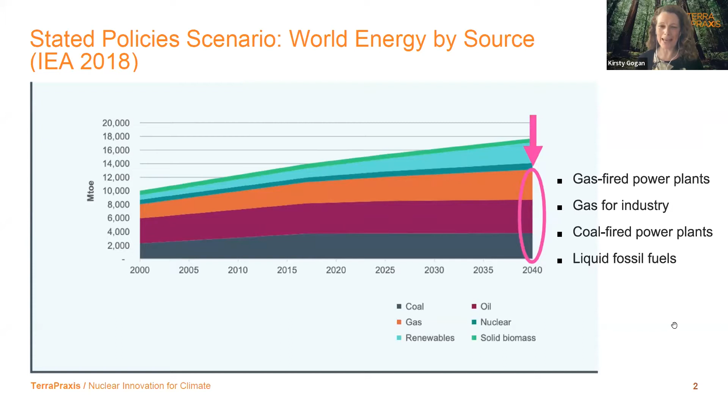So this is why we want to focus on those sectors, coal and liquid fuels, because mainstream modeling consistently projects that most of our energy is still going to come from fossil fuels by 2050. And the hardest to abate sectors are listed here on the side: coal and gas and liquid fuels. The reason I'm showing this chart is because what we're actually looking at is a 3 to 4 degree trajectory of warming, and we have no plan to avoid that outcome. So if you could go to the next slide, please.

Let's just look at coal for a moment, which boomed, of course, into record-breaking generation in 2020 and in 2021, despite all of our efforts, despite COP26. And in 2022, the world now has 2 terawatts of coal-fired electric power plants, adding around 12 gigatons of carbon emissions every year, which is around a third of our total global forecast annual emissions.

Now, you'll have seen at COP26 and in the wider discourse that some policymakers, climate modelers, activists assume that countries are just going to shut down these plants and reduce emissions. But because around half of the coal plants in the world are actually less than 14 years old, it's really, we think, unrealistic to expect such young assets to simply retire. In fact, all of the evidence points to the contrary.

And that's especially when you consider the growing energy demand and, of course, the supply shortages that we're all acutely aware of right now. And even in countries with relatively old plants like the United States and Canada and Europe, closing these coal plants is really difficult and controversial because the loss of jobs and revenues can be devastating for communities. And the utilities also continue to value the reliable electricity that's generated.

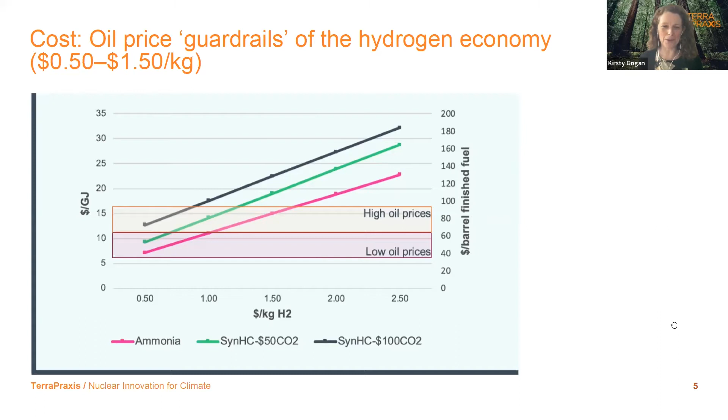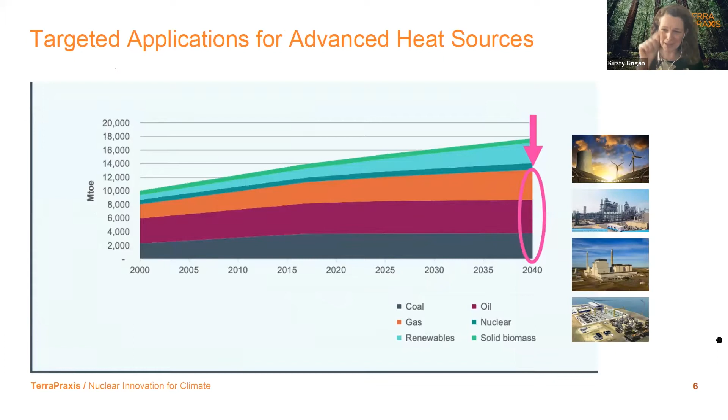Now, I'm going to be focusing today on how nuclear technologies can contribute to these challenges, coal and liquid fuels in particular, targeting the toughest parts of the decarbonisation challenge. So keep this chart in mind. Okay, let's go to the next slide, please.

So if we're going to have nuclear technologies contribute in this way, then we're going to need to design for the requirements, for the constraints. So the constraints that we're designing for here are cost and speed and scale and space. So let's look at these in turn. Next slide, please. So firstly, cost. There's a perception that nuclear is expensive.

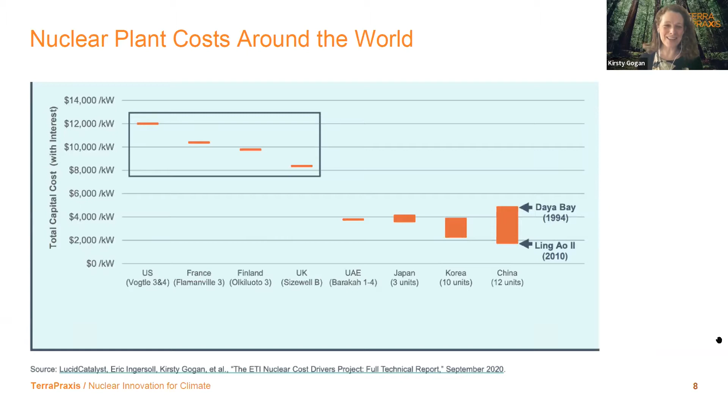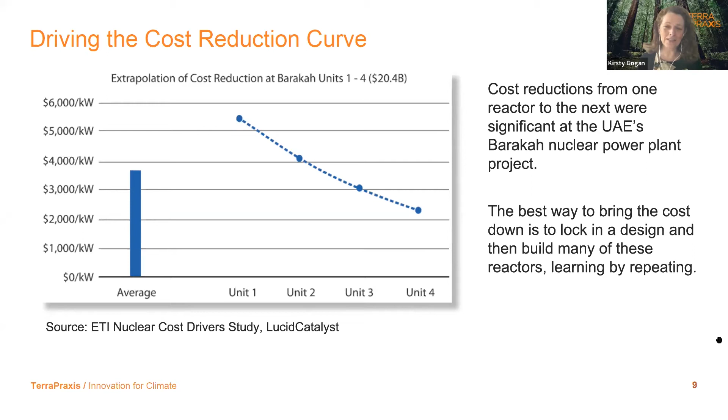So the lesson here is that the surest way to make nuclear or anything really expensive is to do it once in a generation and then stop, and then dismantle all of the expertise and networks along the way each time. And the best way to bring the cost down is to do the opposite, lock in a design and then build it repeatedly. Next slide, please.

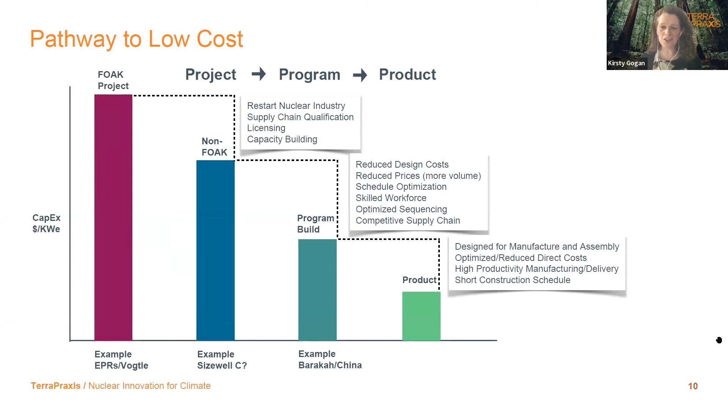So today we're going to hear about how we take some of those principles that I've just described for best practices and cost outcomes, and take them really to their logical conclusion, which is really moving from a project-based approach to a product-based approach, applying the absolute best in class design for manufacture and assembly, and moving into very high productivity manufacturing and delivery environments. This is a very important way of also shortening the construction schedule. You could go to the next slide, please.

So that was cost. So let's look at scale. So we need to start thinking about the scale of the challenge that we're actually addressing. And this is really a big shift in mindset for the nuclear sector, which only has around 400 gigawatts of plants operating today. So if we're pointing nuclear technology at the fuels challenge, for example, we're going to need a radical shift in perspective and ambition.

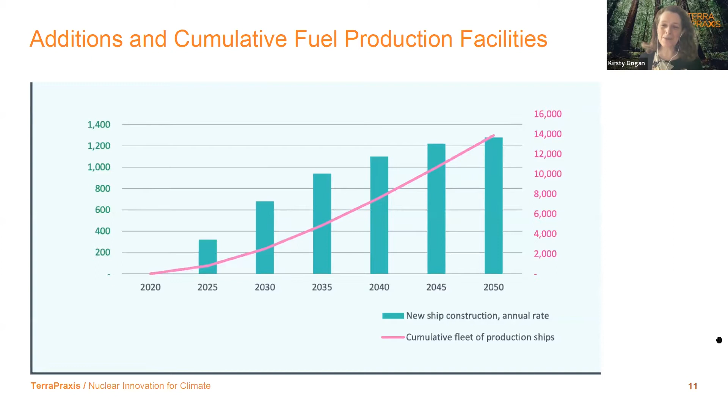So we use today 100 million barrels of oil, equivalent to around 15 terawatts of energy use. That's around 14,000 fuels production platforms if we were to deploy offshore shipyard manufactured fuels production platforms that you'll hear about later in the presentations today, to replace all of that use. 14,000 sounds like a lot, but there's 60,000 large ships already operating in the world today. So it's also important to look at the scale in the context of what's already happening elsewhere in other sectors.

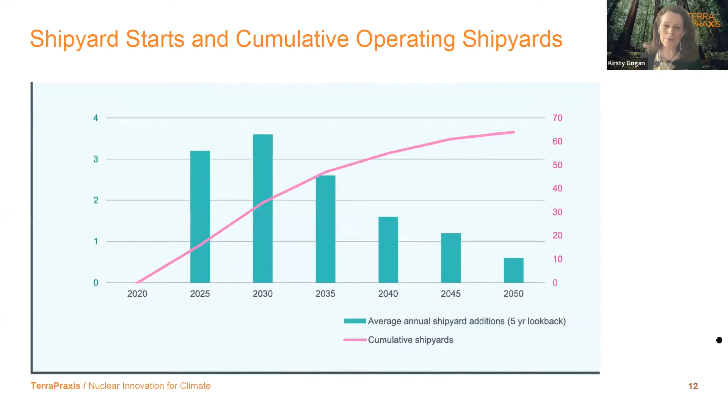Next slide, please. Now, those large ships, they operate for about 20 years, and then they need to be replaced. So world-class shipyards are actually already producing more than 1,000 ships globally, and these shipyards themselves are even operating at around 50% of their potential capacity. So you can see from this chart that global shipyards could actually achieve that very ambitious scale and rate of deployment that would be needed to produce those 14,000 platforms. Go to the next slide, please.

Now, I think we may have skipped a slide. So scale also is important in terms of thinking about the scale of capital investment that's going to be needed to achieve the global energy transition. Oh no, it's okay, you can go back, thank you.

Right now, the global oil and gas industry is projecting around $24 trillion investment over the next 3 decades to 2050 to maintain the current supply of oil and gas, as projected in that chart I keep coming back to. That's capital already earmarked for investment. If we were to try to replace that oil and gas flow with hydrogen produced by renewables, you can see on the right-hand side that would require a radical increase, almost a tripling of capital investment. That's in the context of needing unprecedented investment at a rate never seen before to continue the larger decarbonisation efforts globally, plus investment in additional infrastructure. So thinking about ways of reducing that capital is also going to be very important.

Our conclusion is that if we were to use nuclear technologies, because of the particular attributes of high temperature heat which produces very high efficiencies and productivity, combined with very high capacity factors, tiny environmental footprints, and potentially very low costs delivered with high productivity manufacturing approaches, we could actually lower the overall cost of producing the energy required. My 11-year-old, when I told him about this over lunch one day, said, wait, so you mean it would be cheaper to save the world than to destroy it? It's a funny perspective.

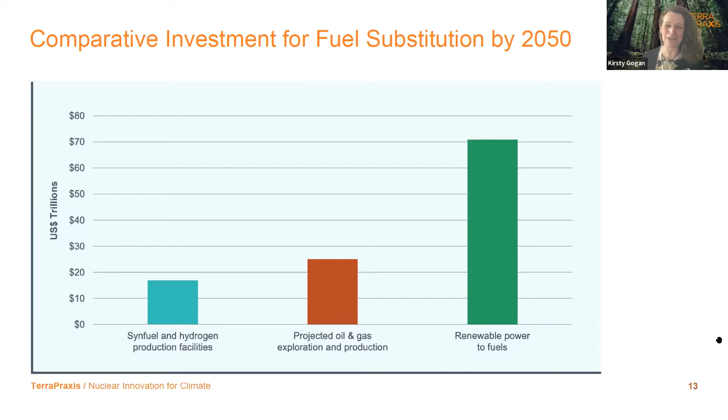And then, okay, speed, right? Our next big requirement. So it's tempting to think that nuclear is very slow and too slow to make a meaningful contribution. The interesting thing is that even the traditional approaches to construction, even some of the not-great examples of nuclear construction, are actually delivering a very rapid transition for their societies.

Nuclear plants are big, and for that reason they take a long time to build, especially given the regulatory environment they're operating in. The delays at Flamanville, Olkiluoto, and Vogtle are explainable, as we've discussed previously—they're first-of-a-kind projects starting construction without a completed design. But the global average construction time of nuclear plants is around 7 years, and the fastest ever large nuclear new build reactor was in Japan, which took just over 3 years.

But even the failed construction projects aren't that slow. You can see in this graph that even Olkiluoto in Finland, as a single project which took 16 years from start to finish, has actually been faster on a per capita basis than wind and solar combined in any nation within the same time frame. So while it takes many years to build a nuclear reactor from start to finish, the payoff is enormous and worth the wait.

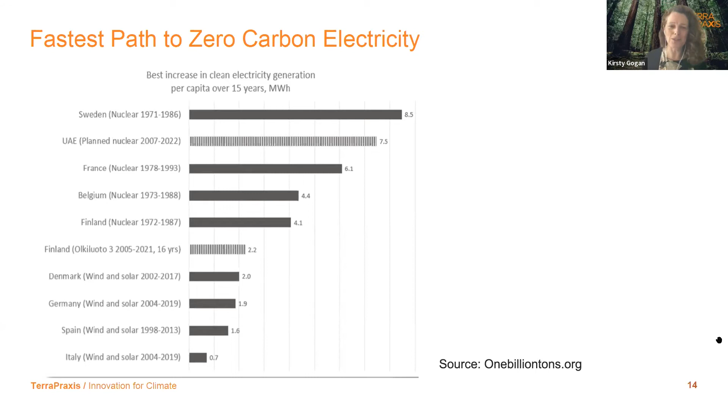Finally, space. We've heard about cost and speed and scale, and now let's look at space. Here's a map showing the space requirements, the area required, if you were to replace the UK's current oil consumption with hydrogen generated either from wind, solar, or advanced heat sources. Wind is shown in the big pink area, projected as a continuous wind farm filling the entire area, which isn't actually feasible, but this is just a thought experiment to give us an idea.

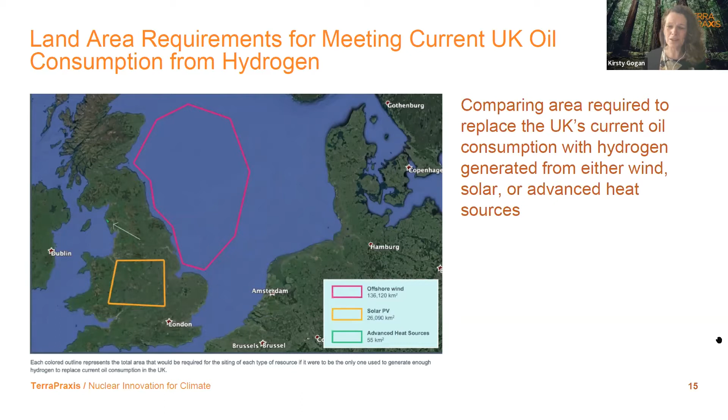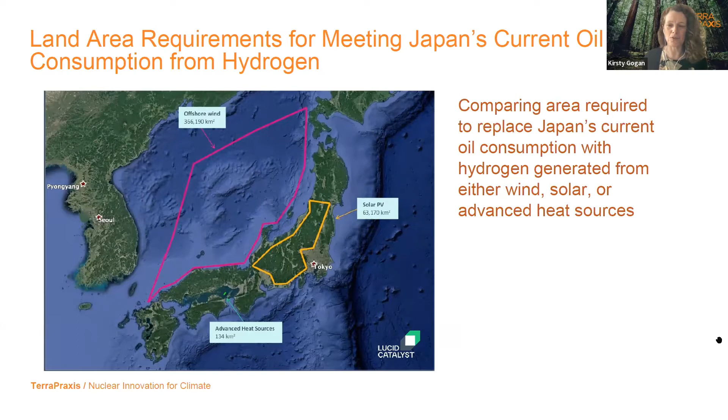We have a similar map for Japan. Now, the major oil companies we're working with are really acknowledging this critical constraint to their ambitions to replace their fuels production with green hydrogen produced from renewables. It's becoming apparent that the scale of production viable with these technologies just isn't going to match the kind of scale of production that the oil and gas sectors are able to achieve today.

Those are the design requirements: cost, speed, scale, and space. Now let's look at how we meet those through some innovative design approaches. If you could go to the next slide, please.

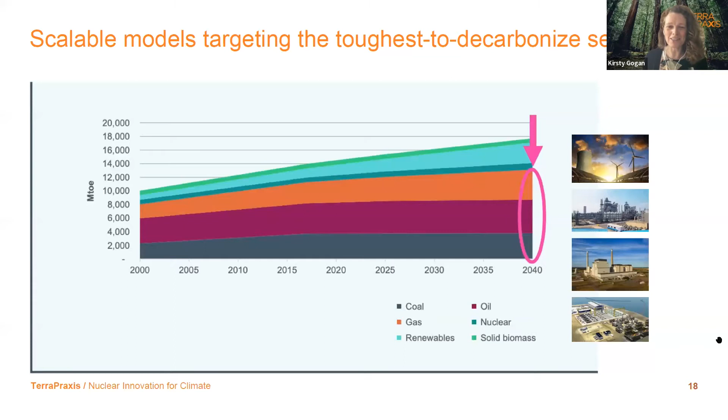So you recall the critical sectors that we need to target, and now we're going to look at some deployment models that can address them. We could go to the next slide, please.

So you'll hear today about two new approaches to meet the challenges presented by coal and liquid fuels that are being designed to meet these climate scale and time scale requirements. Firstly, repowering coal. This is a program of work that Eric Ingersoll will be presenting on shortly. The vision is around the opportunity to repower our global existing coal plant infrastructure in a way that can greatly accelerate the clean energy transition and also enable a just transition.

And if you could go to the next slide, please. Liquid fuels—you see here a refinery scale hydrogen gigafactory, which has around 36 high temperature heat sources equivalent to around 20 gigawatts installation. Because this facility is producing commodities rather than electricity, it's possible to achieve a scale of installation which enables the full integration of the manufacturing, installation and production facilities all on one site. 20 gigawatts sounds quite big to the nuclear industry, but actually it's equivalent to a small refinery. So again, it's important to match the scale of the sectors that we're addressing, and also to put the scale into the context of the scale of the markets that we're addressing.

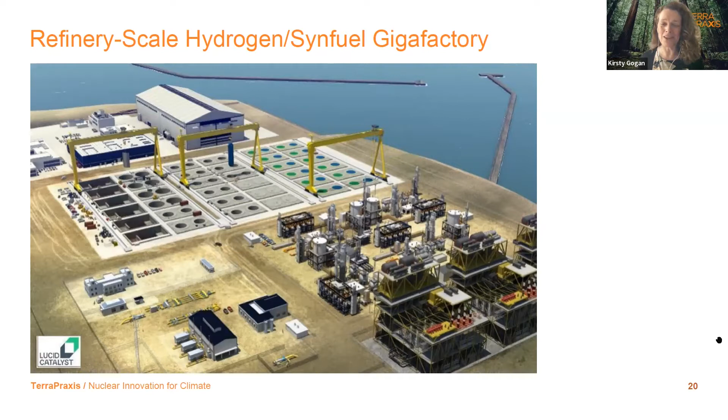This facility would produce hydrogen at less than $1 a kilogram, and 10 of those would entirely replace the UK's current oil consumption. Next slide, please.

And then I think Andrew Sowder is going to present a new study about shipyard manufactured fuels production platforms. The idea really is that either you bring your factory to the project, which is the gigafactory that you just saw, or you bring your project to the factory. In this case, we'll be looking at world-class shipyards, which are some of the highest productivity manufacturing environments in the world.

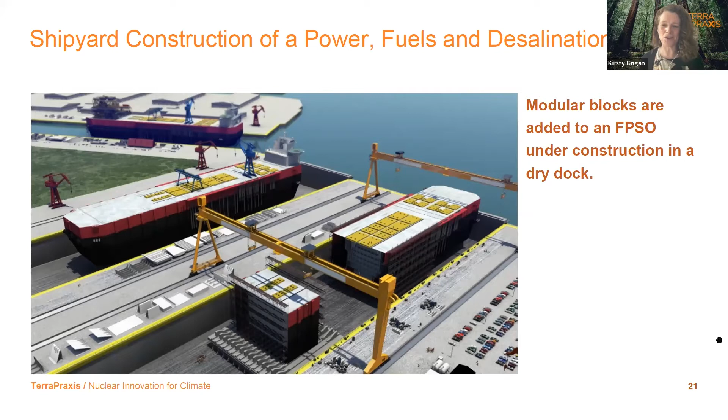Next slide, please. So in conclusion, we've talked about cost, speed, scale, and space, but really it's all about cost. Let's get the next slide, please.

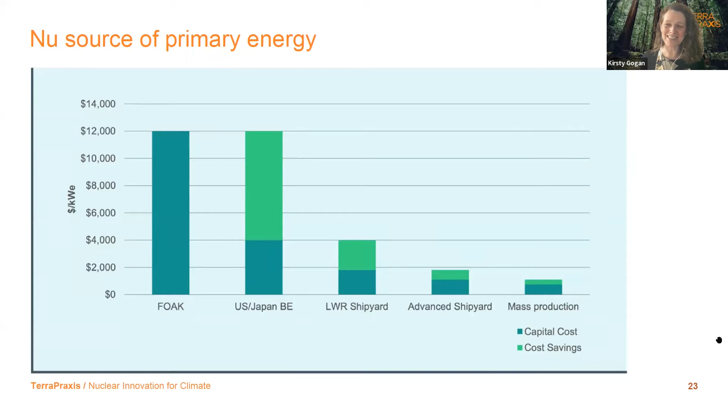Perfect. Thanks a lot, Kirsty, for sharing this vision, which is going to shape the discussions today. It's important to have an idea of the importance of scale, cost, and speed in order to meet climate targets in hard-to-abate sectors, but also an interesting vision to leverage existing infrastructure.

So with this now, the idea is how this vision could become a reality, and now we are trying to explore this in the next session, which is called Improving Constructability with Small, Modular and Innovative Nuclear Designs.

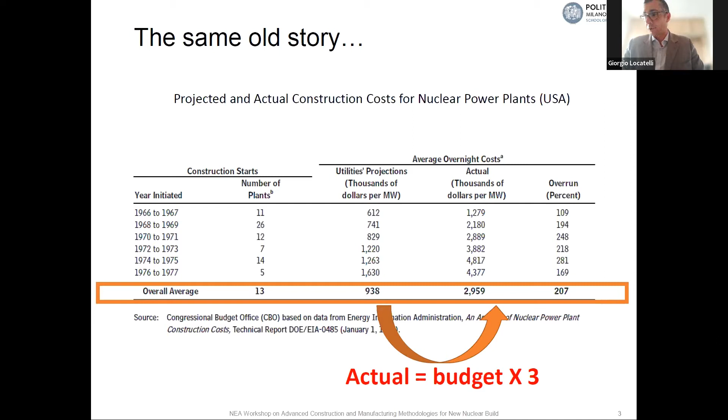This makes nuclear power plants extremely competitive. This makes nuclear power plants financeable. So there is nothing wrong with the technology, because this is the same technology that had 3 times cost overrun in the United States—it's the standard PWR of 1 gigawatt. It's about how you manage the project, or even better, how you manage a program.

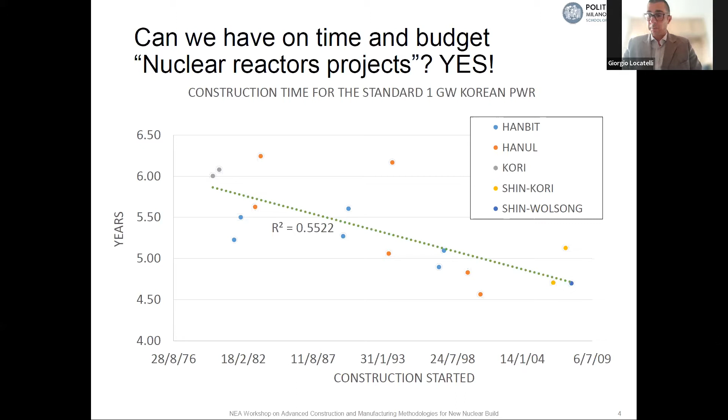And there is a strong statistical correlation between cost overrun and size. This is not just in nuclear, but in all kinds of infrastructure. The larger the project, the more likely you will be over budget, and the overrun will be greater in both absolute and relative terms. This is what tons of research made by very different people shows us.

Ideally, when the project is bigger, it becomes fragile. So when you have a large project and things start to go wrong, they are very, very hard to fix. This applies to and is correlated with the size of the project. Why? Because maybe you have very few suppliers you can switch to—there's very specialized equipment, cranes that are so big you have just one or two in the continent, and so on. So the idea is that the larger the project, not only are you likely to be over budget, but the project becomes fragile.

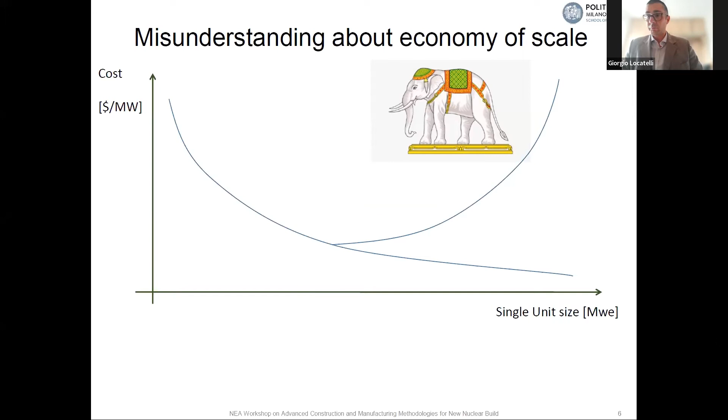Next slide. What we know works is what we call economy of multiples—the idea that cost decreases according to the number of units you produce. This is everywhere: look at your computer, look at your mobile phone—these are so cheap because we make millions of them. This is true for renewables too, as we saw the cost decreasing over the last 20 years.

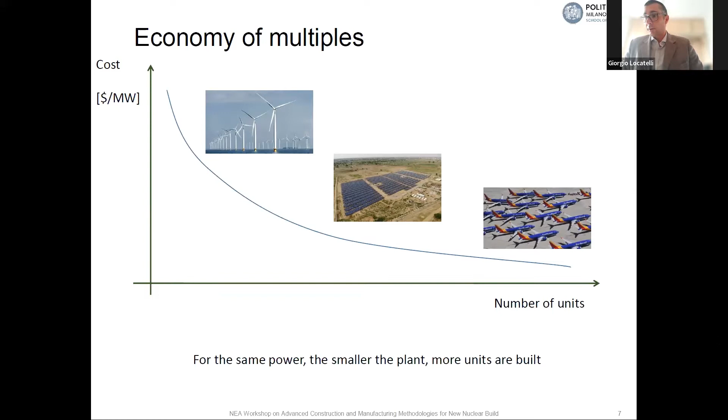This is very true for another safety-based sector, the aircraft industry, where Boeing or Airbus produce a new type of aircraft. They don't build 20, they build 200 or 300 at least of those aircraft.

So I think we needed to think a bit more about this idea. Traditionally, we have a monolithic plant that we break down into sub-elements. We call this modularization. But at the end, we still have one plant. At the end, when the plant is built, there is no difference. Then we have standardization, what the Koreans did, the idea that you rebuild this plant over and over and over.

What my research shows is that the real advantage comes from modularity. When you bring together modularization and standardization, this is what the aircraft industry does, because aircraft are both modular and standardized. So they really achieve modularity and they achieve low cost. Same for the wind industry, the solar industry, and the computer on your desk now.

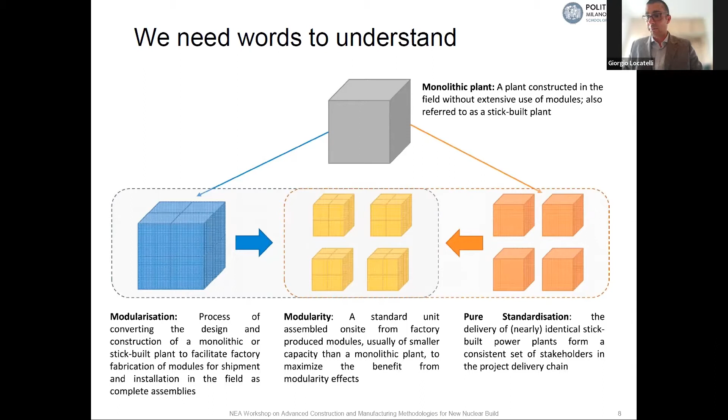So standardization comes in two forms. Standardization comes as physical standardization, delivering the same product or the same service across different markets. Coca-Cola is the same everywhere, despite changing the font according to the local alphabet. Ryanair is one of the most interesting cases - they have 300 aircraft that are always the same aircraft. That's physical standardization, and the nuclear industry is starting to learn this.

The second one is project delivery chain standardization - not just the supply chain, but the project delivery chain. This includes the standardization of the contractor, but also the owner, the sponsor, the safety agency, and so forth - all the stakeholders involved in the project. This builds long-term trust, builds long-term value, and increases capabilities, which is a key element of stakeholder involvement.

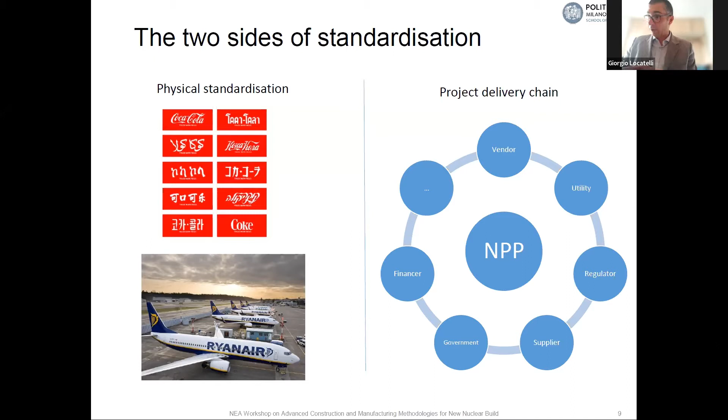So what about risk? When we move toward modularity, toward small modular reactors, there are first-of-a-kind costs that are unknown. This is true for large and small. But with a small reactor, you are gambling far less money. Instead of gambling 10 billion, needing to finance 10 billion that is very expensive, you only need to finance 2.

There are exogenous risks - exchange rate, interest escalation, legislation change. Yes, they are true for large and small, but small are faster.

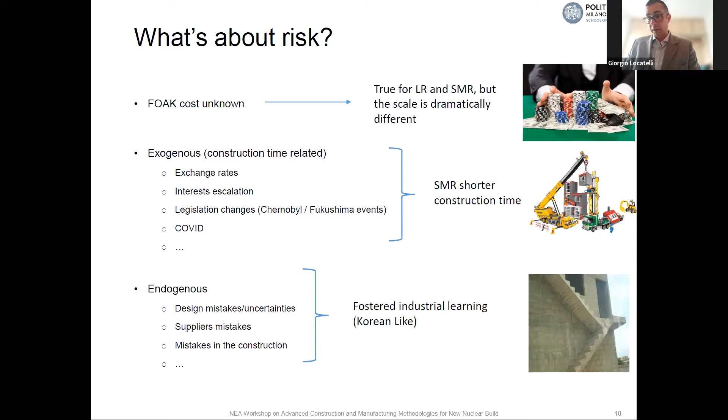There are endogenous risks. If you look at a power plant like Flamanville, and this is public information, you see there was a lot of rework and design mistakes, for instance with the weldings. You can make mistakes on large and small projects, but on small ones, the mistakes are usually easy to correct. And again, you are playing around with 2 billion and not 10 billion, so it's much easier and better to learn on a small scale than a large scale. Similar logic applies to mistakes by suppliers and workers on site.

This is probably the most important slide in my presentation. When you have one standalone reactor, you cannot do benchmarking, so you don't know how much it's going to cost or what the risks are. One of the most important things in a complex project is starting from a completed design. Many times nuclear reactors in the UK and USA started without a completed design, with tons of issues. You have that problem when you have a standalone reactor.

You don't have that when you replicate reactors. You develop stakeholder accountability - because if I have to sell you just one reactor, I can tell you all kinds of misleading messages. And once you've started, you have to continue. When you're 2-3 billion into the investment, you're not going to give up. With modularity, you can stop after the first units and say, thank you, that's enough.

You can have economy of multiples - the idea of learning from stakeholder involvement - and you can exploit siting economy. Lastly, there is the point of economy of scale. You don't have to be too small or too big, and this is country-dependent because each country is different and has its own needs in terms of electricity.

That's it. This is the idea that I wanted to share with you.

Thank you, Giorgio, very much. It was, I think, a very interesting presentation, giving several key insights, including concepts like modularization, standardization, how they interact, how both of these are important in a project, stakeholder accountability, including how we can learn from different stakeholders involved and how accountable they should be, and what to do about economy of scale. I think that was an interesting part where you said how big is actually too big, so we need to understand at what point economy of scale actually starts to become a more complex project than being cost effective.

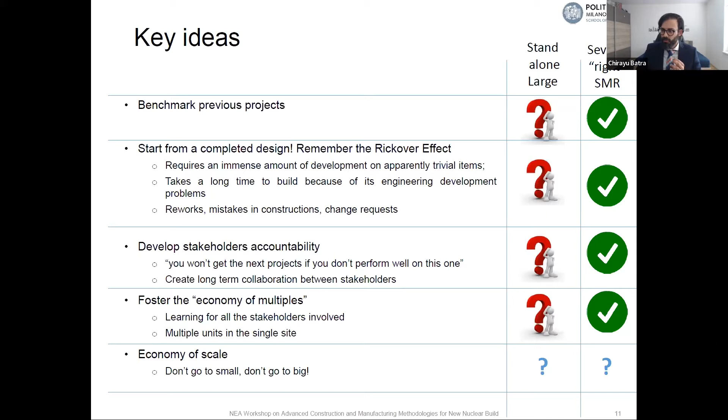Okay, so let's move to the next speaker, Andrew. He will present today on rethinking nuclear deployment for zero carbon energy at scale, a vision for 2050. Andrew, the floor is yours.

Okay, well, thank you very much, and I appreciate the opportunity to share some of the work EPRI has done. Appreciate the invitation from the NEA to share today. So, along the lines of what we heard initially from Gogan and then the first speaker, I'm going to focus on what EPRI has done in terms of visioneering for the future, on how to rethink nuclear deployment. Next slide.

So what I'm going to do in the time I have today is summarize a study that was recently published in December of last year, and it's publicly available, so the URL is there at the bottom. As the title says, this was a study intended to rethink how we go about deployment of new advanced reactors at the scale and time frame of decarbonization.

I will admit, though, that when we first started this project, we were probably asking the wrong questions, because the study initially began looking at what was the market potential globally for nuclear power in non-electric markets, with an eye towards decarbonization. The problem is, starting from that direction, we were essentially asking the wrong question, because we were chasing after the markets using the current deployment model. And what you ended up having is a very fragmented approach, but facing all the same construction issues.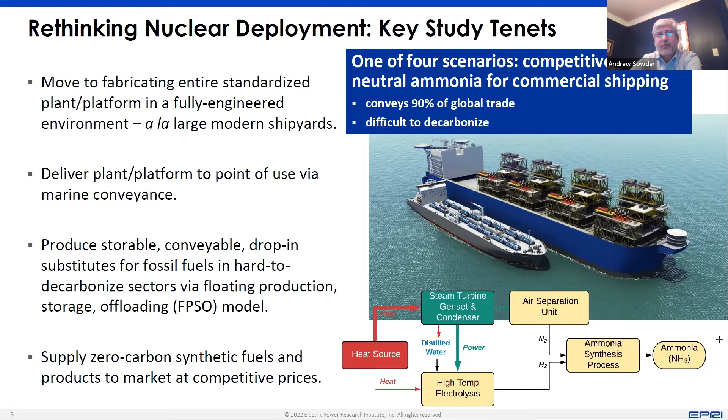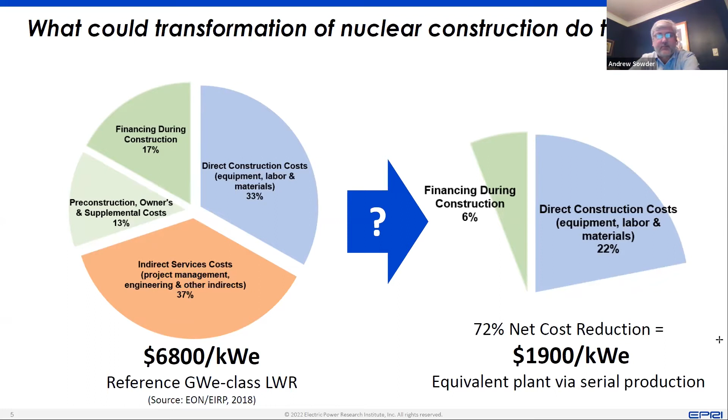So at the end, what matters are the economics. I mentioned that we looked at 4 scenarios. I did not spend time today on these scenarios themselves, but rather the deployment models that make them possible. And we did indeed use traceable technoeconomics; the nuclear estimates were from an actual developer and from estimates provided by a competent shipyard in Asia. So these numbers were probably as close as you can get today to a high confidence number without actually building a plant. What we found was that the cost of the zero carbon fuels, for example Jet A, a complete drop-in substitute for jet fuel, is indeed competitive with the benchmark price circa 2019.

Ammonia for shipping, a like-for-like liquid fuel for liquid fuel replacement of bunker oil and diesel, again, close to current global prices, but again, zero carbon footprint. Hydrogen, as Kirsty mentioned, just below $1 per kilogram, and electricity at a very competitive price, as well as desalinated water.

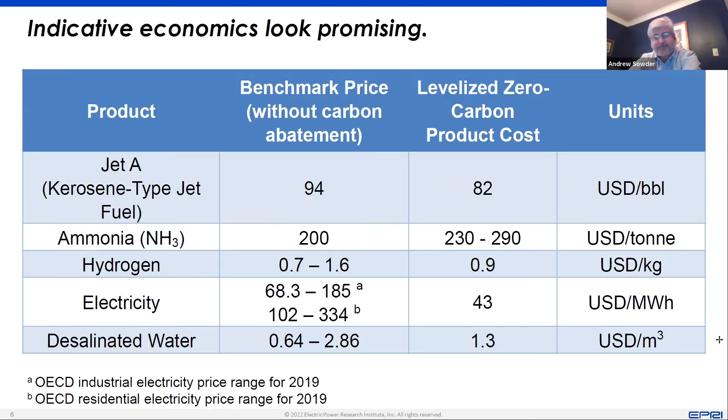Okay, thank you, Andrew, very much again for these insights. And I think you did a good job in reiterating that what matters is economics, as Kirsty said as well. So I think in the nuclear industry, economics of cost is always something that we have to answer or maybe rethink. And as you said also, other than a lot of things that we need to rethink, rethinking the deployment strategy is definitely one of them. I've read the report that you mentioned, and I think it's quite interesting. And I also encourage the attendees to take a look at that report.

I have also noticed that this approach of changing the land-based site to shipyard-based site is already being adopted by a few SMR startups. And I hope they will try to follow this through and see how the outcomes are by following that strategy. What I also believe is that having a very solid delivery model and innovation in manufacturing will be very important in such kind of transformation. But thank you again, Andrew, for this great presentation.

Okay, let me now invite Jaimie to talk about some interesting examples from the UK government's platform approach to industrialized construction. And I want our next speakers to be kindly aware of the time constraint that we have. I don't want to rush you. Please take your time, but let's keep time in mind as well. Thank you. Jaimie, please go ahead.

Thank you. I've started the stopwatch, so I'll try. Firstly, can you see my screen? I'm sharing my slides. Can you see that? Yeah, I can see it. It's in full screen. Please go ahead. Perfect. Okay, thanks a lot.

Yes, as you heard in the introduction, I've spent my career working in public and private sector, trying to help people transform construction from the current labour-intensive, carbon-intensive, low productivity industry we have into something more like manufacturing, with all the benefits that manufacturing's seen in terms of safety, quality, productivity, etc. So that's been quite a long journey. A lot of my time has been working with UK government, so getting a client with a long pipeline of projects is one of the ways that we're really going to shift the needle on this, and that'll echo with some of the things you've heard from other speakers.

So despite the topic of my talk, there's nothing I'm going to talk about in this approach which is actually UK specific or centric. This is a response to global challenges, and so if the solutions we're looking at are of any use, they've potentially got massive global applicability. And while I'm going to talk about approaches to buildings and roads, which is obviously what UK government's spending money on, there's nothing in this approach which is specific to those sectors. And actually, Eric's going to talk after me about the application of this thinking to the energy sector. And hopefully you'll see parallels with things that I'm going to talk about and what the previous speakers have mentioned.

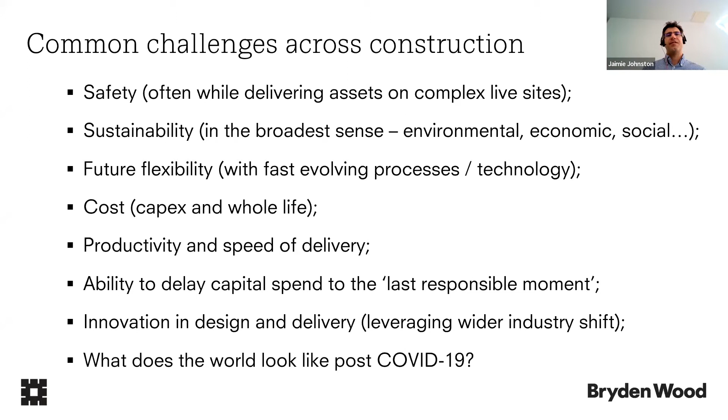So UK government has been on a journey over at least a decade now, but certainly over the last 5 years, it's been persistently shaping its strategy to how to use its pipeline and its spending power to transform construction. You can see some of the wording from the autumn statement. We're going to use this lever that we have to change construction. And they arrived, I think, at the same conclusion that the earlier speakers have mentioned.

So I didn't know what Giorgio or Kirsty was going to talk about, for instance, but one of the things they've recognized is that treating every project as a bespoke one-off, never capturing the learning, never transforming things in that way, is one of the things that's massively holding us back. And looking at the differences between sectors is one of the things that's blinding people to some of the solutions.

So you'll see as we move on to the right-hand side that some of the language they've started to use is saying, we're going to look for commonality across sectors. We're going to start to use common components. We're going to start to use repeatable designs that I can use again and again, refine over time. And that's how I'm going to get into the continual improvement cycle that manufacturing does so well.

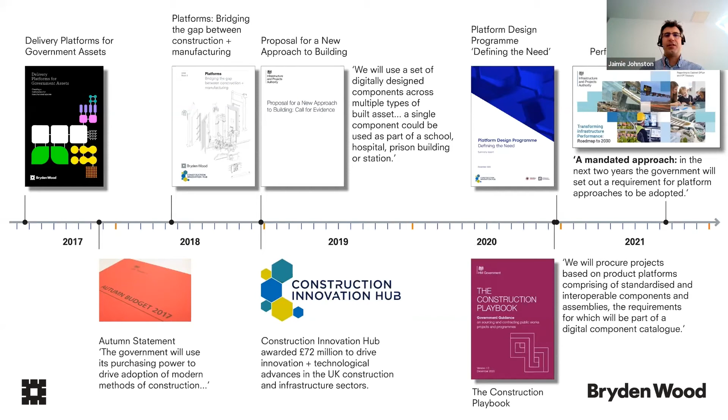So one of the key concepts they developed was, rather than focus on the difference between every sector, rather than think of education and healthcare and prisons, et cetera, if you looked for commonality between lots of building types, almost certainly you'd find there's loads of commonality. So things like floor to floor heights are set by the size of people, for instance, which means you can get light 8 meters into a building. And that's why schools and apartments and healthcare all have the same sort of spans.

So one of the key themes was saying, how can we get more granular? And I think it's like Giorgio's slide where it showed the modularity. How do I identify those components that we could configure in lots of different ways across lots of different sectors? That's how we'd get into the sorts of numbers that manufacturing likes. And that's how you start to get the economies of scale.

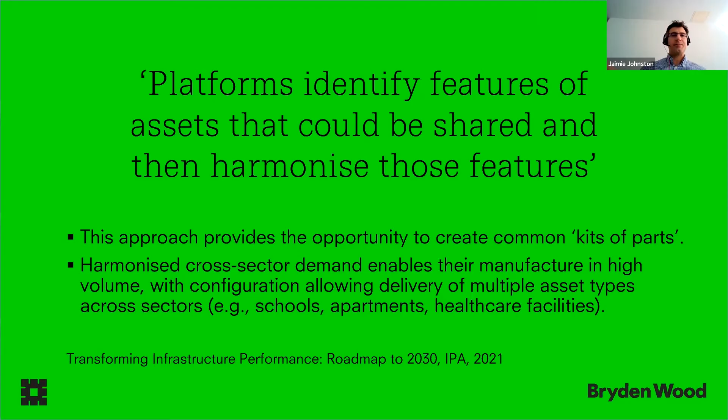One of the precedents we used with government was IKEA, because everyone's already familiar with this sort of platform concept. IKEA weren't the first to do it, but they're certainly the ones that have done it at greater scale: take furniture making, which was a very skills-based, trade-based, labor-intensive bespoke process, and boil that down into a tiny handful of components that you'll all have used at some point making IKEA furniture, and still get a range of furniture. Whether you buy a wardrobe or a bed or a chest of drawers or a bookshelf, the components are always the same.

But on Giorgio's point about the supply chain, actually the process is always the same, the book is always the same, the tools are always the same. So they've turned what was quite a bespoke process into a very small series of repeatable components, repeatable tasks, small number of tools. And actually the supply chain for furniture manufacture is now everyone in the world who's made a piece of IKEA furniture. So that was the thinking of saying, what does that look like for construction?

And we've made some big strides in this in the UK. We've developed lots of these solutions. I don't have time to talk about them in detail, but I'll show one example in a couple of slides. The reason the government wants to do that is because if I had that repeatability, suddenly I get into a stable pipeline or demand for the same components again and again. Suddenly I get stability in the supply chain, that if they know there's this consistency, they can gear up and meet me halfway.

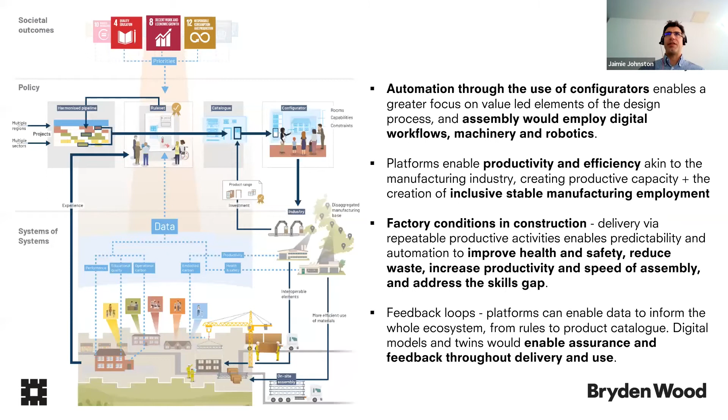So I'm going to show a video which hopefully will play, which is one example. It's one of the kits or parts we've developed being used to build a superstructure. But what it demonstrates is that with a very small number of people, with a very small number of components, we can actually build a superstructure of a building that ordinarily would take an army of people, a team of people building things very slowly.

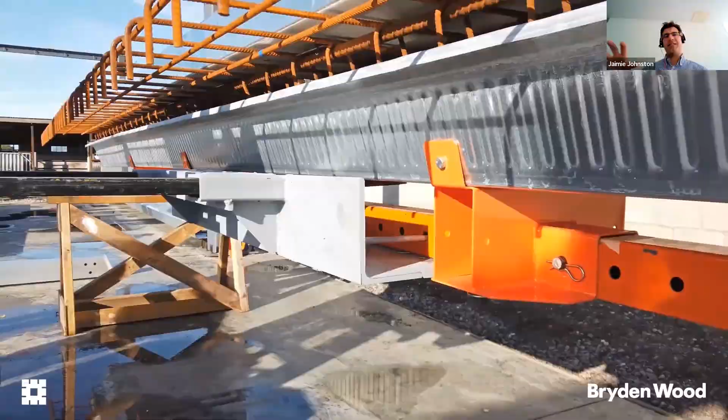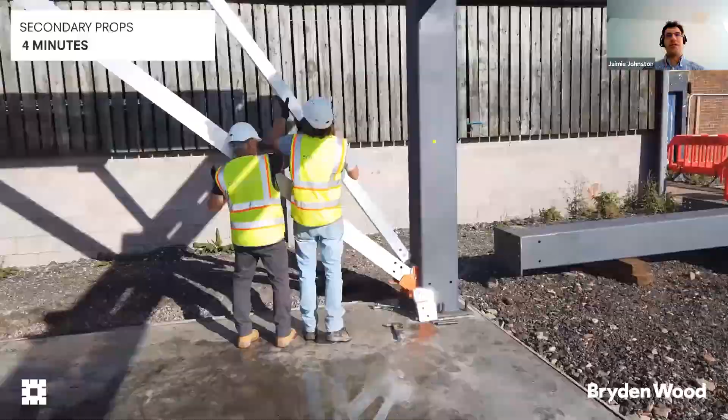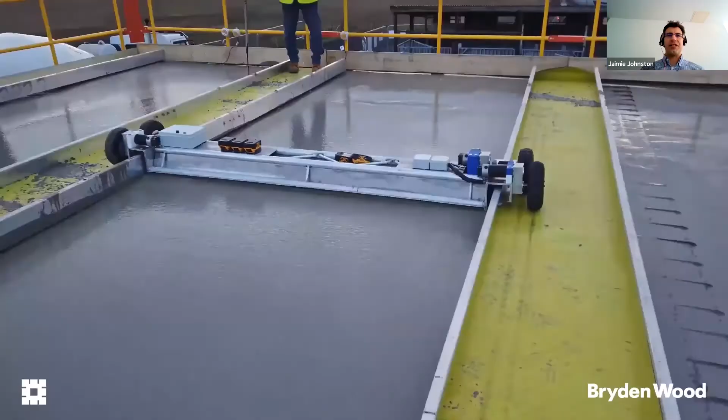So this was the prototype, but we've actually done this live on site now. What you're seeing here is the building of a 9 by 9 meter grid for a commercial office. But what you can see is there's a very small number of people on site. We're measuring activities in minutes, not hours. The components are very straightforward to assemble, which means the skills required are very low. This team is actually building the floor above from the floor below, so they're never working at height, meaning they're always working very safely. The components are laser cut, so they go together very precisely. There's a little bit of automation. We're using very low carbon materials.

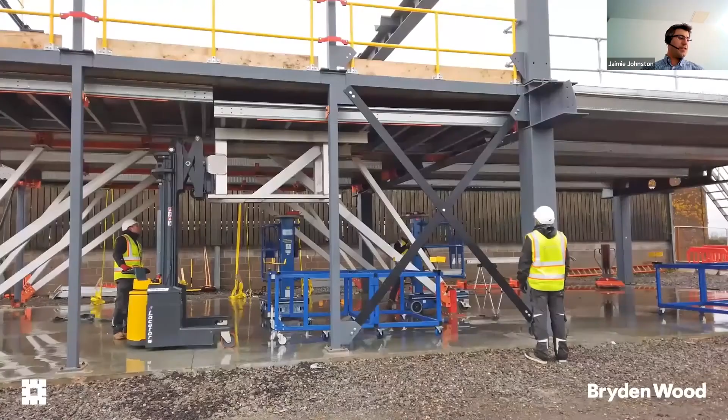So this has been demonstrated on a live site, this project is the first net zero carbon commercial building in the UK. And we've demonstrated you can almost certainly build most building types about twice as quickly with about half as many people. So a 4 times increase in productivity, which if you then apply that at the scale of UK government spend, we're going to start getting some quite dramatic impact in terms of cost, carbon, and productivity. But you can see here a lot of this thinking chimes incredibly well with what the previous speakers have talked about in terms of commonality, repeatability, consistency.

This is how we're going to start to shift the needle. One aspect of that is physically building things - we can be much quicker and much safer. The other part is if we're using digital libraries of those components and each component knows how it relates to the other components, then you can start to automate the way those components go together.

So we've been developing a whole range of computational design workflows, algorithmic workflows, automated workflows that mean that rather than a designer slowly developing 1 or 2 concepts, we can use an algorithm to generate 100,000, even 1 million totally compliant designs. It can never design something that's not compliant, can never break the rules. But it means that rather than doing a linear normal design process, trying a couple of ideas, you actually test millions of ideas and then down select and say, show me the ones with the least amount of cut and fill, the best utilities, the best site utilization. So it's a much quicker, much better design process.

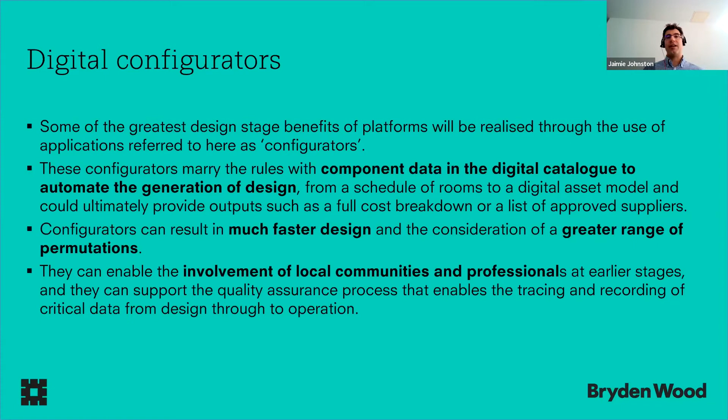So we've developed lots of these, again, in public and private sector across lots of different sectors. The one I'll show you a video of in a second is called the Rapid Engineering Model for Highways England. We worked with Highways England to take all of their technical design standards, and we codified those. We had a library of all of the components they use for motorways - the gantries, the refuge areas, the signage, all those sorts of things. We generated an algorithmic assessment which takes a section of the country or a section of road, analyzes that, and then auto-populates that model. So it knows what sort of context every component is looking for.

It knows the visibility distances, it knows the gradients, it knows the curvature of the road, and it automatically generates a quite advanced design. But to give you a sense of the speed of this, it now generates the same quality or a better quality design in about 2 to 4 days that it used to take a team of 25 people 15 months to generate.

So the speed with which we're generating things isn't 5% or 6% quicker, it's a fraction of the time. If you think of the numbers Kirsty was talking about earlier that we need to populate these things at, you can't design those scheme by scheme. The only way we think we're going to get to those numbers is by using repeatable manufactured components at scale, driven through automated design processes and approvals.

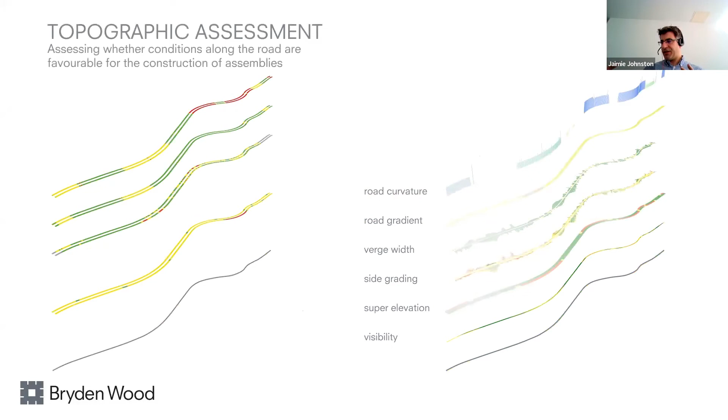This video gives you a sense of how the rapid engineering model works. It takes a stretch of motorway, automatically assesses it, looking at curvature, gradient and all these features, building a mental picture of what the road is like. Because every component knows how it relates to the road and to each other, it automatically generates the design for you. It can never break the rules.

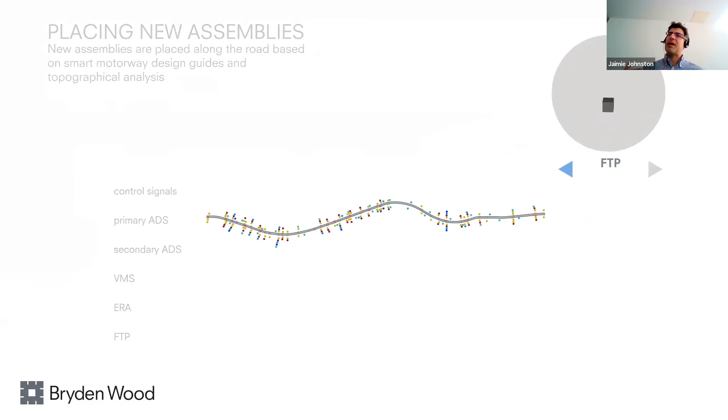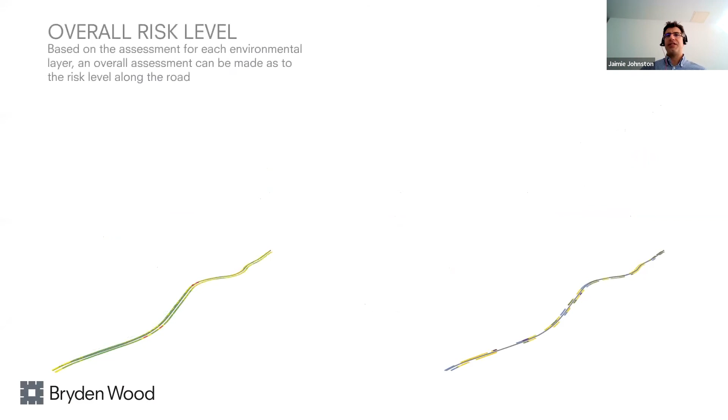It actually finds better solutions than humans do because it tests more things and tries more concepts. It will also look at ecological, visual and heritage factors, designing around constraints within the site, and then it instantly generates lots of different ways of interpreting or engaging with the model.

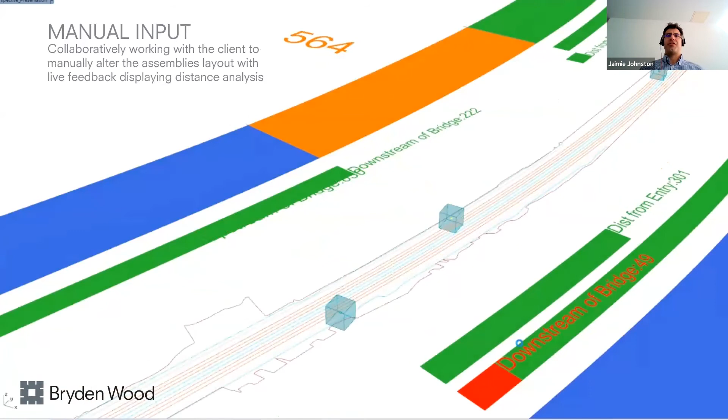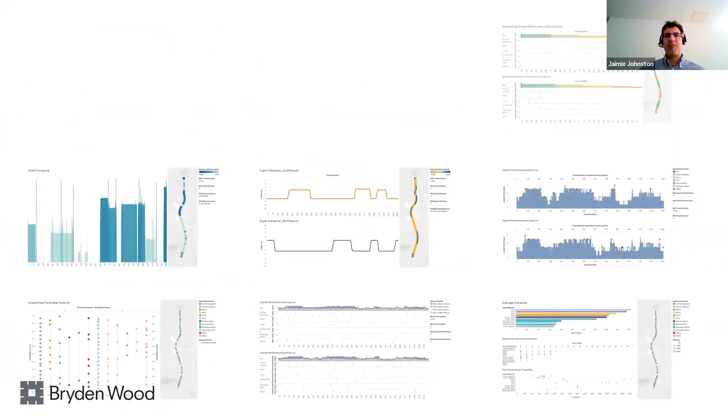There's another version of this evolved for Network Rail, and another evolved for Transport for London. So what we're seeing is more and more industries taking this and propagating it across sectors, and more and more people taking the component approach. I think there's a massive overlap between the approach UK government is taking and the conclusions most of the speakers today have arrived at.

So I'm going to hand over to Eric now, who's going to show you an application of this in the energy sector. Thank you very much.

Yeah, thank you very much, Jamie. I think if I take some key insights from the presentation, it's listing common challenges which every industry deals with, and more so in a regulated industry like nuclear, we have to think more about it. Treating every project as bespoke, one-off, might not work for our industry either, and this has also been echoed by previous speakers. I believe that this is a valued case study for all industry.

Maybe sooner or later we will also get into the era of 3D printed reactor components, and there we'll see how we can make these assembled models in future. The highlight was when you said we should design in a way that you can never break the rule. I think if we can do this in the nuclear industry, following all the codes and standards, not breaking a rule, that will be the highlight of achievement for our industry.

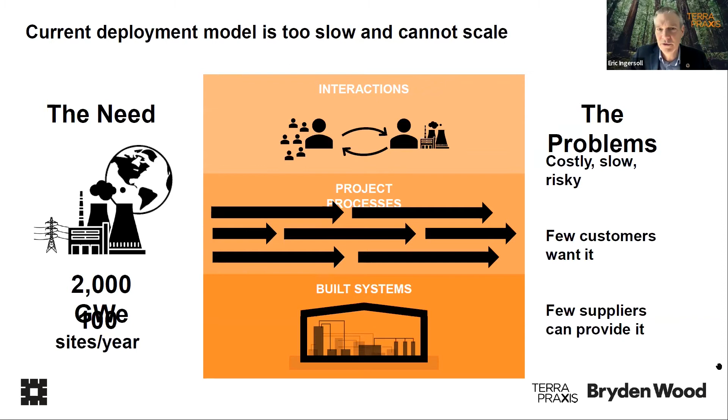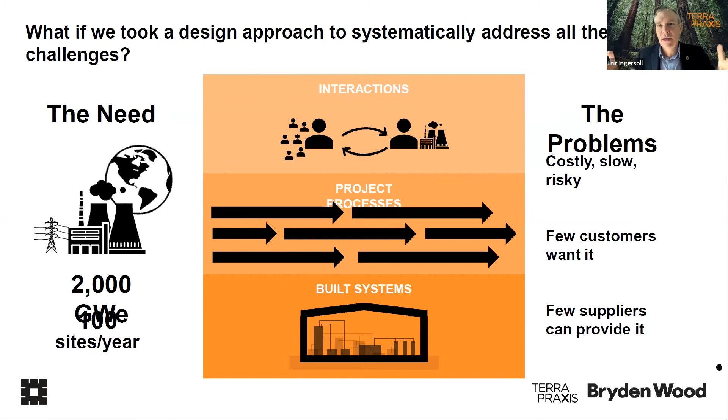I just want to point out that what we're doing here is taking a design approach to systematically address all of these challenges. We're not saying, let's just make some modules and then, whoops, the regulator doesn't like them, or whoops, we didn't have a real manufacturing environment to make them. This is not just a technical solution we're talking about — it's an integrated system for solving all these constraints.

So briefly, what would this system need to do? There's a potential $4 trillion market for advanced heat sources. We first need to make projects cheaper, faster, and less risky — a lot of what Jamie was just talking about, ways to engineer out the factors that cause those undesirable things. If we do that, we will drive more demand. If we're solving a customer's problem and can turn it into an attractive investment, we'll have more customers. And as we engineer these to have a broader supply chain, lower risk, and faster implementation, we'll have more customers and more suppliers who can play in this global market for productized building systems.

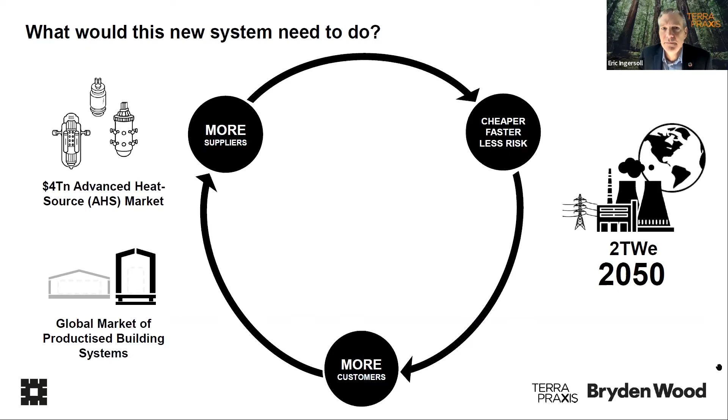So again, we're talking about a coordinated platform approach that solves problems at the built systems level, at the project processes level — the whole development process for the project from the customer's perspective — and the interactions between all the parties necessary to efficiently deliver a project.

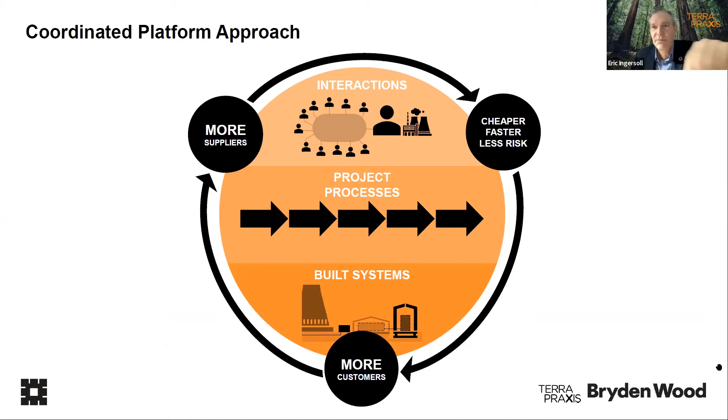The built systems we're talking about here are the ones necessary for providing a new heat source for a coal plant. We're talking about a standardized advanced heat source or advanced reactor built in a standardized building, on a seismic isolation system, with efficiently regulated systems and buildings for the supporting systems, which may not have to be nuclear safety grade, a heat transfer and storage system — a kind of USB connector between the advanced heat source addition to the project and the existing coal plant — and an ability to reuse as much of the existing coal plant infrastructure as possible.

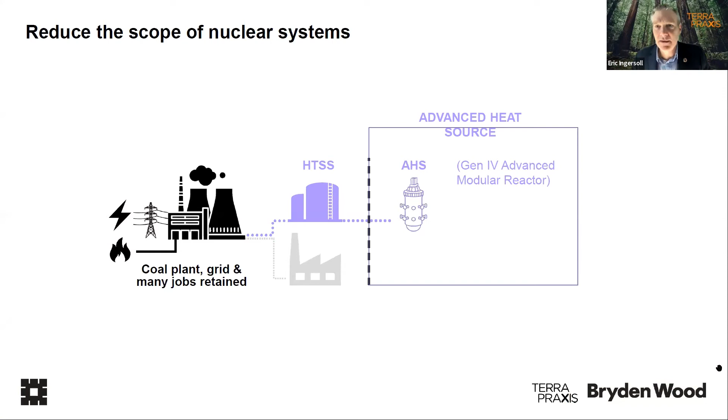So the first design approach is to reduce the scope of nuclear systems. What we're doing is confining the quote nuclear part of the project to just the part that is the heat source. The rest of it is isolated from being nuclear by the role of the heat transfer and storage system, which cannot propagate accident initiating events back to the advanced heat source.

Next slide. This is what that looks like in the kind of physical manifestation at the bottom. Next slide.

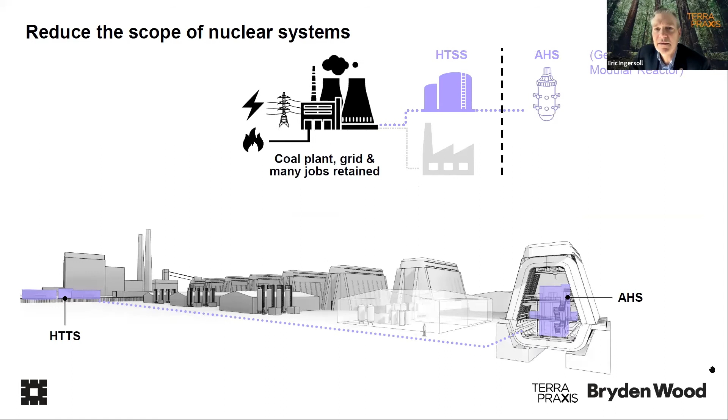The second major design innovation is to enable full standardization of the building systems and reactor systems through seismic isolation, which is widely used in commercial buildings and even in some nuclear plants in South Africa and France, to transform the differentiated seismic conditions around the world into a standard set of low acceleration seismic conditions that would enable complete reuse of the designs.

So no site-specific re-engineering of those systems. Repeat after me: no site-specific re-engineering. That is how you make something into a product. That is how you eliminate the complexity of very long and difficult regulatory reviews.

Instead of trying to say we can make this, please treat our thing as a product, we're actually making the design choices to enable it to be a product, to be fully standardized. Next slide.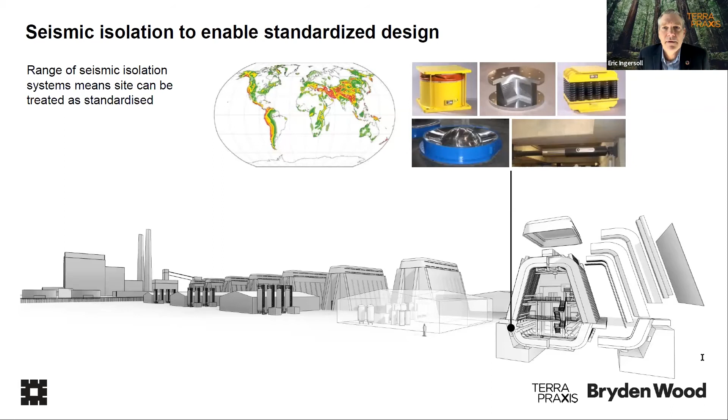Then, as Jamie was mentioning, you have a standardized building. The next thing you want to do is really reduce the variability in the execution of that building design. That means you want everything to be very high tolerance. You want full-on manufacturing of almost everything in the building, and a very well-defined, easy, and high quality assembly sequence.

So this is really using design for manufacturing and assembly, which is essentially how all products are made today. There are no products that don't use this process. But it means you are thinking extremely carefully about how the parts are made, how the quality you need in those parts is assured, how those parts are stored, transported and deployed on the site.

The assembly process for those parts, the validation, the approval of the assembly process - all of that is something the manufacturing industry has brought to an incredibly high art, but which we don't use in the construction process.

And Jamie's company and Jamie's work, a lot of that is around basically how do we take all the stuff we have - it's like, hey guys, we solved all these problems in this other industry sector, let's just see if we can use their techniques and processes and supply chains to make the stuff we need. So this is really about driving out all the variability and messiness in construction.

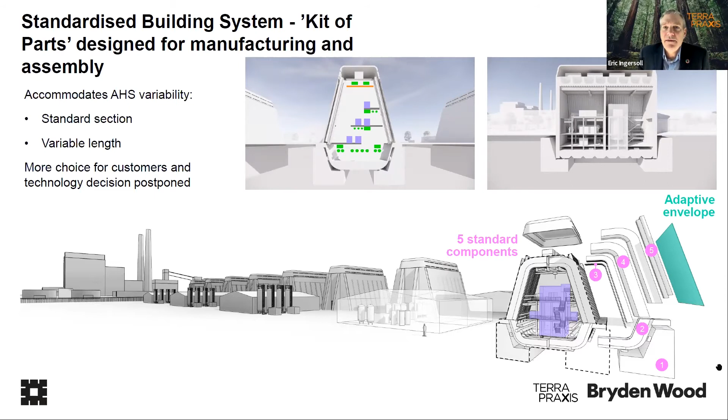And so this, you basically end up with modularization of systems. Systems are put on skids and built in factories and then brought to the site. And then factory production of a large amount of the structures, the components that go into making the structures.

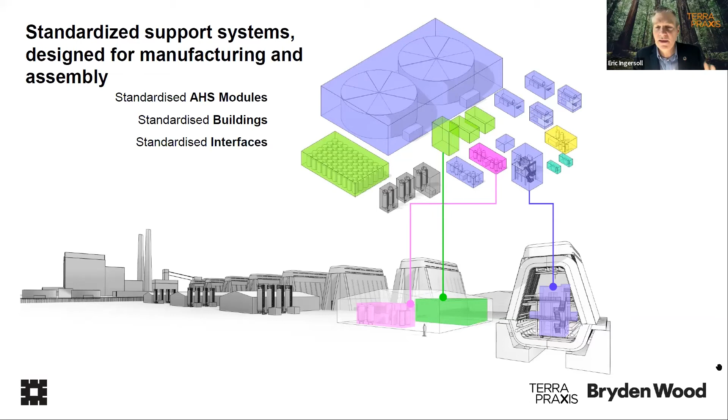And a rigorous approach to figuring out which systems are common to all the advanced reactors, or most of them, and which systems require being in a nuclear grade building and which don't, and so forth, really apportioning that so you put as many things in commercial grade buildings and as commercial grade systems as possible. This also helps reduce the complexity and delivery challenges.

You need to pull all of that variability and those requirements into your system and have an automated design tool that basically generates a version of the standardized building designed to take account of those things and be ready for those variations, just like the road example. Next slide.

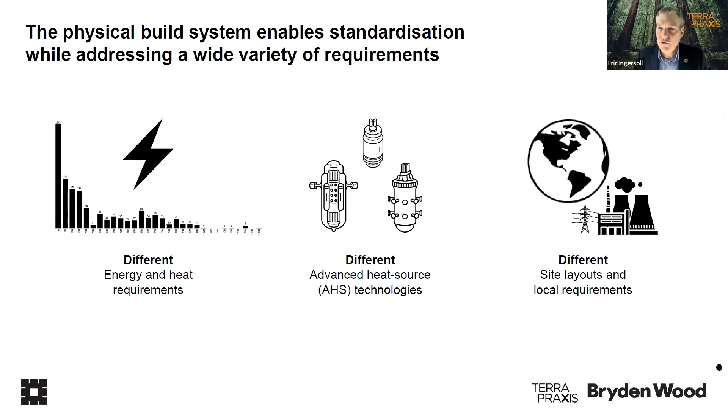The second area that we saw in that circle in the beginning is the project processes. I'm going to go through this very quickly, but it's a big topic. Basically, each project has to go through a series of decisions and planning processes in order to determine whether you have a viable project, what's the best form of the project, and who's going to be involved.

Right now these processes, especially the front-end processes of screening and project definition, are very expensive and slow and difficult if you're trying to repower a coal plant. A typical development process - if you think about a company like NuScale or the Vogtle project, look at what they had to spend before they started construction, it's hundreds of millions of dollars, if not billions.

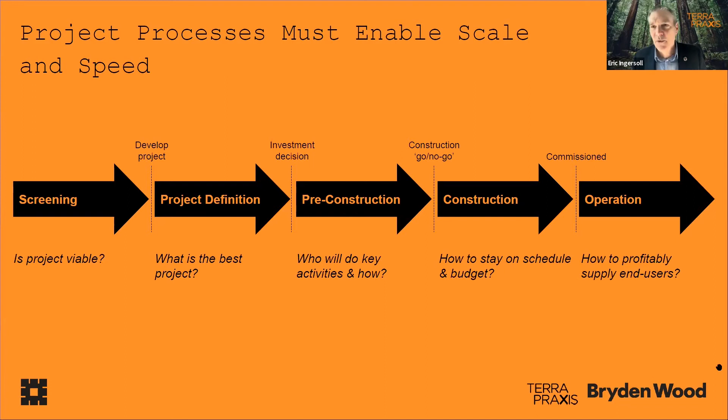I like to say the nuclear industry has come up with the product that is the most difficult to buy of any product ever developed. We need to change that. If we want to achieve scale, we have to make this easy to buy - the best thing. You wake up, you look at the options and go, wow, this is really the best one. It's fast, it's low risk, it performs the way I need it to perform.

So the first thing we're doing in our project is developing a cloud-based tool to help customers, coal plant owners, assess the viability of their plant for repowering. The idea is that you log into a portal - we're working on this with Microsoft, who will provide software development and hosting for this platform. The idea is that this would help you decide whether you have a viable project or not, and roughly what the shape of that project should be.

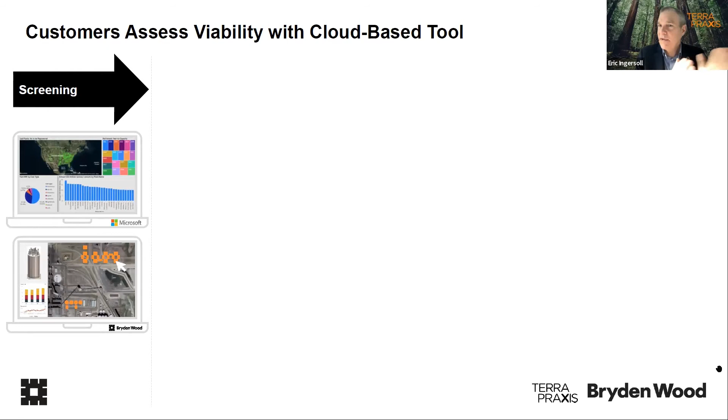So the idea of this tool is to turn you from a potential customer into somebody who's actively developing a project.

Then you have the more detailed design tools that Jamie was talking about, where we're going to develop tools that will actually do a preliminary design and, in fact, a detailed design of your plant using the approach we described. We're not going to be doing this ourselves - we're not going to become the EPC or the designer. These tools will be available online, and customers will pay to use them, designing the plants and then contracting with builders to build the plant using this system.

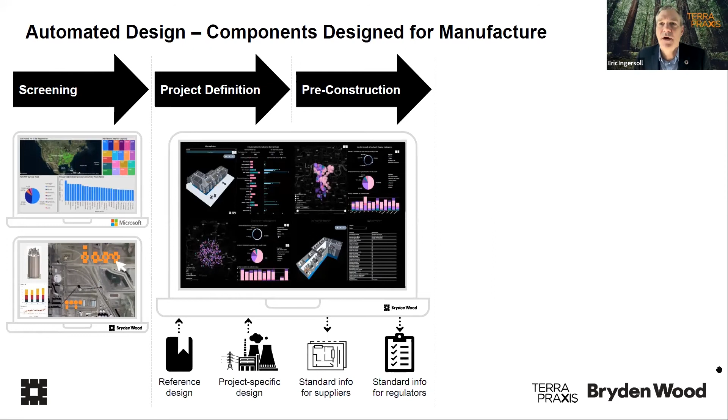Then there'll be tools to help with the construction, and we're also talking with some vendors who want to develop tools to help with operation.

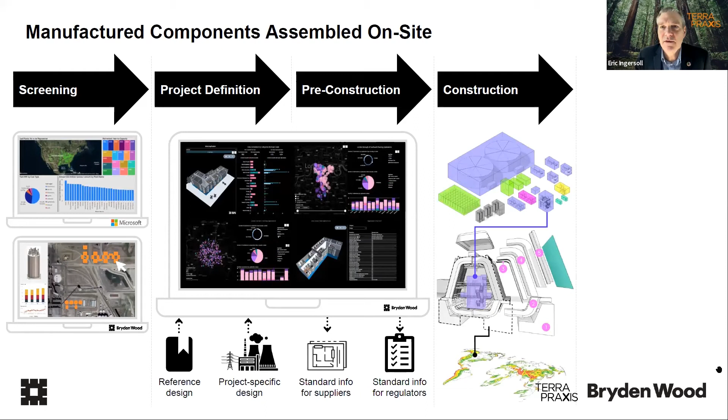So the idea here is really to develop a tool set that helps customers with project development. How do we turn customer project development into something like Jamie was talking about - used to take $500 million and 5 years, and now it's a weekend with 5 people working on it, let's say. That's a slight exaggeration, but we want to make this into something you can do in a year and get through all these phases, and quite cheaply.

And we're doing that in parallel with the development of the advanced heat sources, so when they come through the demonstration projects, there'll be projects ready for them.

I'm just going to go very quickly through this part. The idea is that you need all these entities to be involved in making a project successful. We now have great examples of information sharing platforms for business ecosystems where these processes become automated and data exchange happens very easily. So our plan is to build this kind of platform to enable projects.

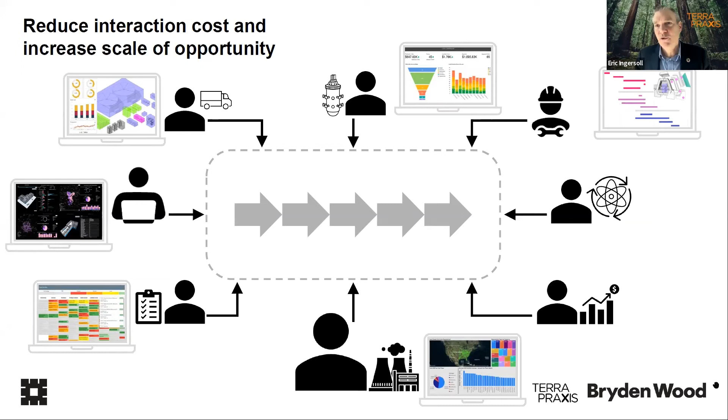This will reduce interaction costs and increase the scale of opportunity, which is necessary if we want to achieve speed and lower costs, but it's also necessary if we want to bring in more participants and increase the scale of industry and scale of deployment.

So the tools that we're developing, as I mentioned, each of these stakeholders will have their view of those tools as appropriate. And that will essentially enable more rapid decision-making and rapid coalescing of this demand.

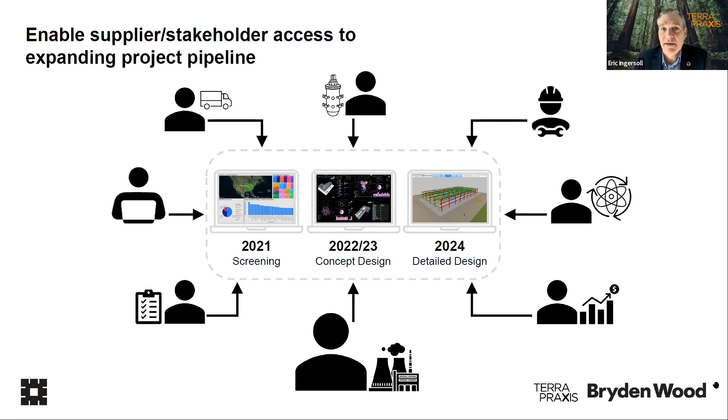So our goal is to have hundreds of projects having made their way quite far in the project development process, so that they're ready to begin ordering and installing these heat sources that are being developed by the advanced reactor vendors.

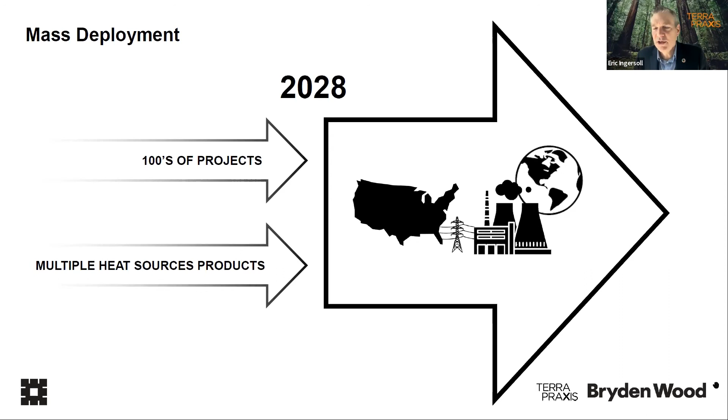And that means the advanced reactor vendors are delivering a standardized manufactured product to a project. So that can be licensed once and then replicated across all these projects because they will have standardized seismic and other conditions. Next slide. So that's how we're kind of attacking this problem to repurpose 2 terawatts of coal in 28 years. And we think we can achieve less than $2,000 a kilowatt all in for the repowering project, which translates into approximately $35 a megawatt hour for the electricity.

And this reduction in risk and cost is going to enable many, many more customers. So ultimately we'll drive thousands of projects for these technologies, which means that we're really creating a multi-trillion-dollar market for advanced heat sources, which is going to attract a lot of investment. And as Kirsty mentioned, this is going to mean that large manufacturing companies who know how to deliver things at scale will view this as a big opportunity and invest in this and become the kind of suppliers that we need to really scale this up.

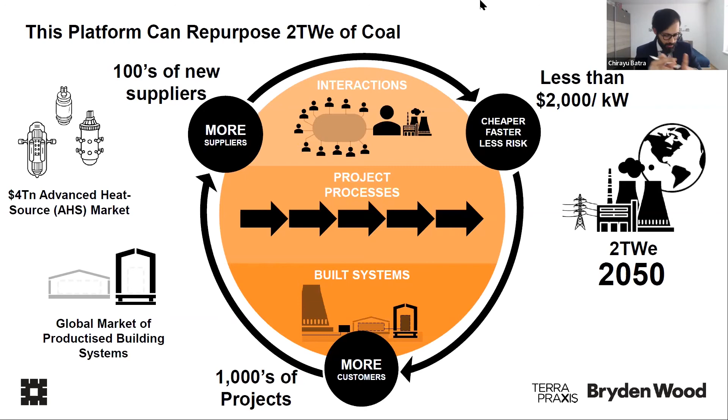We have, I think, 10-11 minutes for a panel discussion, which might not be a full-fledged panel. I request all the panelists to kindly switch on their camera so that we can have this group view. I have a few questions that I want to ask this panel. I also took a look at the Q&A session. There are some interesting questions there also, but they have been answered in the Q&A panel. I might pick a couple of them from there. But let me start with this first question.

We have been talking about modularization and how it can be advantageous in different scenarios. Let me address this first to Giorgio, and then I request others also to add: what are the main disadvantages of the modularization approach? And could there be situations where a stick-built approach could make more sense? So I would like to start with Giorgio, and then I request others to add.

Thank you very much. So the key disadvantage of modularization is that it requires more upfront engineering, requires a more complex procurement, and limits the possibility to change during construction. So modularization is a great idea when you have to make hundreds of identical units, because that really speeds things up. You don't need to do re-engineering for each unit and so on. But when you have maybe 1 or 2 units, what the empirical evidence shows us is that modularization makes things more complex and creates more problems than the problems it intends to solve.